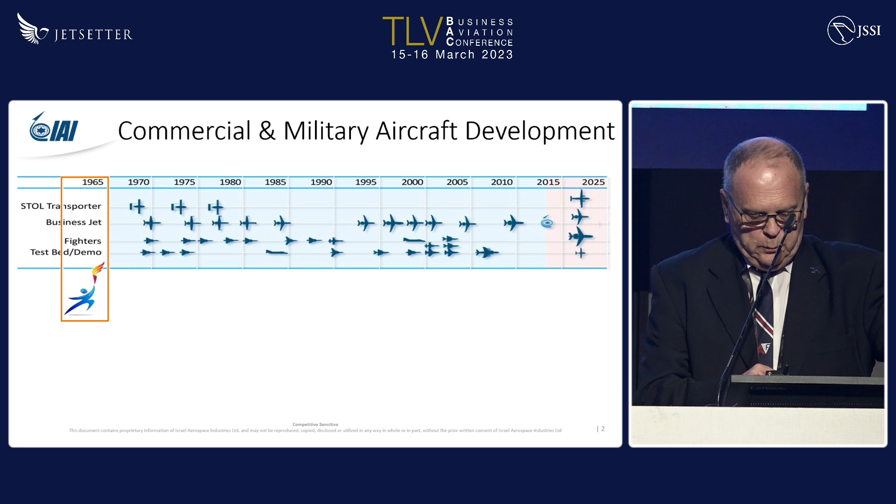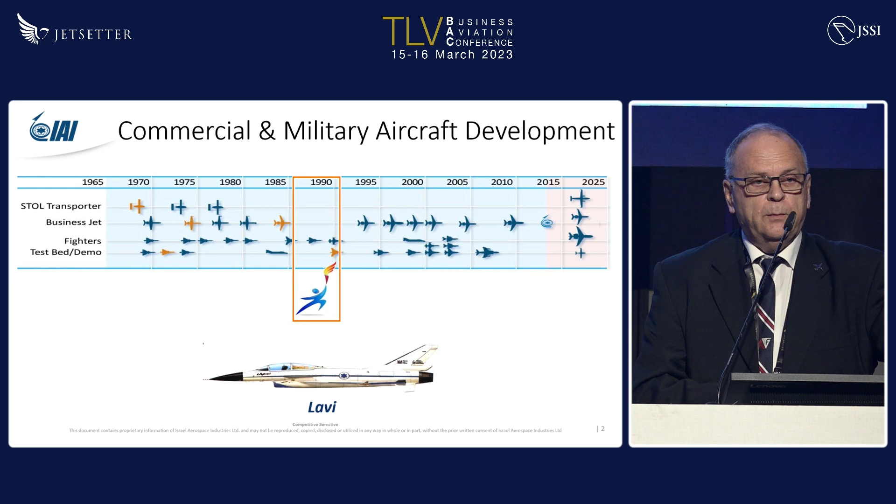This is the torch that we are carrying through the years. You can see here the Arava in the 70s, the Kfir fighter, the West Wind, which started the real business jets, the Astra, which became the G100, the Lavi, the famous Lavi fighter, unfortunately canceled, the Galaxy G200, the G150, which was the first program that we made together with Gulfstream, and now the G280, and the future is ahead of us.

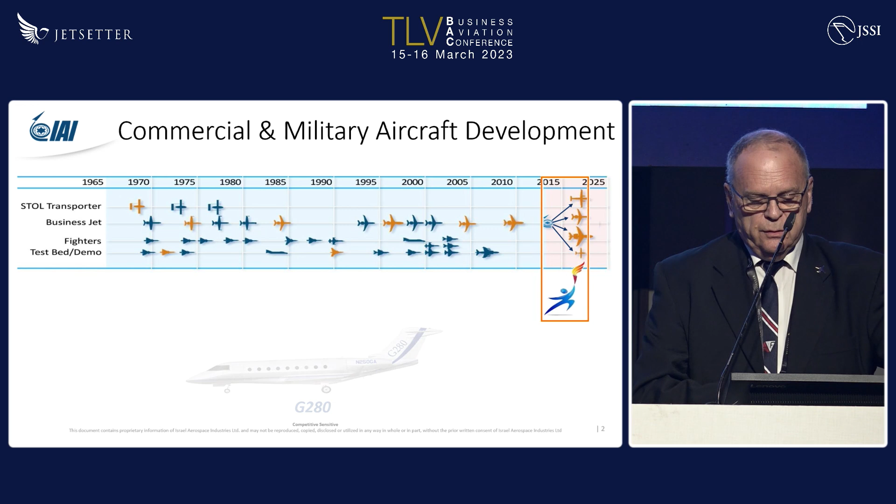So, a few notes about our line of business jets. We have the G150, which was co-developed with Gulfstream. By the way, I think it's the first time in the history of aircraft development that one OEM chooses another OEM to develop, produce, certify, and deliver a full aircraft. So the G150 was the first one. The G200 already existed, and the G280, which I'll talk about a little, is the next one. By the way, the G200 created the super mid-size niche.

It was followed by the Challenger 300 and so on. So now it's a proud thing for us. The G100, you have here the numbers. We produced 150 aircraft of that type.

The most important parameter for business aviation is dispatch reliability. It holds 99.63%, and the G150, 99.82. We delivered also close to 150 airplanes. The G200, as I said, the super mid-size, still holds a very high dispatch reliability, 99.88. Criteria of that is 1 or 0 if you have a delay of more than 30 minutes, and this is an NBAA standard. And the G280, our baby, which is in production now, 99.8 dispatch reliability, is the best in class according to external sources.

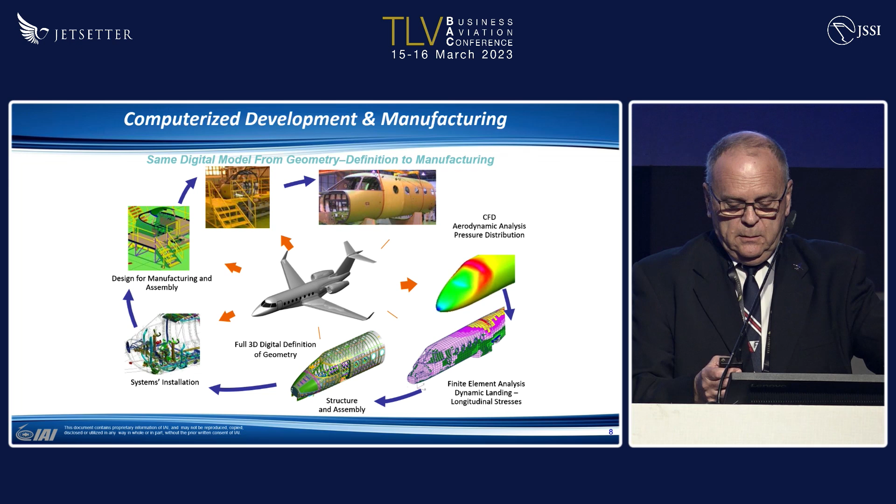So what it gives: first of all, I want to mention that our engineering development center has all the disciplines to create a clean sheet design of all platforms, including, by the way, UAVs. So they do it for all of IAI's applications, including also some integrated facilities: wind tunnel center, ground test center, flight test center, simulators, antenna and radome test ranges with a variety of applications which we will not talk about today, and system integration labs.

And it all comes together to a process which is led by the engineers, and all this certification process from preliminary design all the way to certification, and I'm talking FAR 25 certification, which is the same as for the big guys.

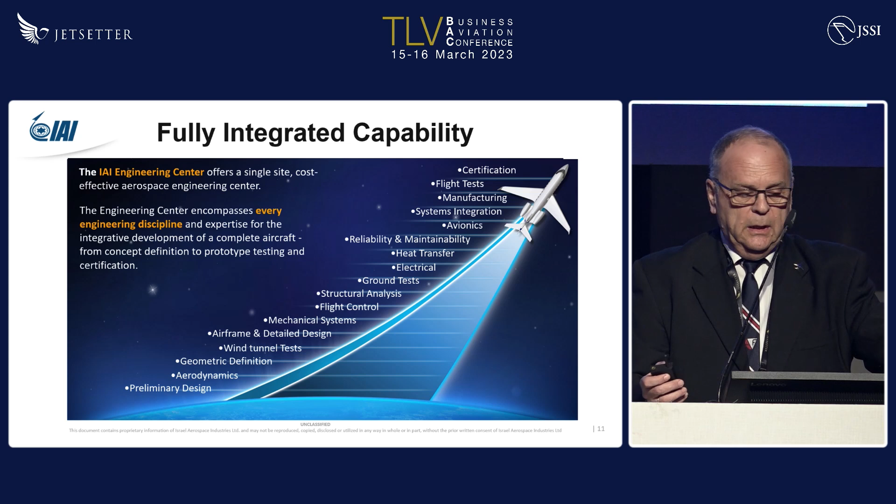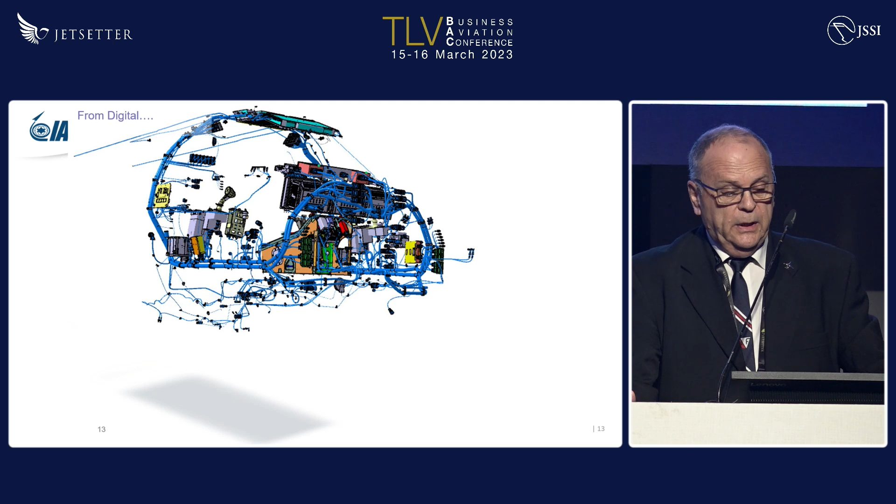Now a short illustration of how it's done. We call it from digital to reality. This is the digital mock-up. No more physical mock-ups, of course. Structure, systems, wiring, tubing, avionics, everything comes to the cockpit and creates the real reality. A look from outside, and this is how it's done. So precise design, accurate manufacturing, and it becomes a Lego process, no trimming, no shimming, as the slogan says, and that's how we do it.

Now, after we have the aircraft, we get to flight test, my favorite. This is a snapshot, a few scenes of the G280 certification flight test. This is the first flight, and we took the aircraft to almost all of the envelope, including landing gear operation, which is quite unique for first flight.

Nowadays it's more common. Telemetry room - we took the practices that we had from the fighters, that you don't need the room on the aircraft, which makes it more efficient.

This is some icing testing that we did abroad in the States. You see the remaining of the ice. It's a full campaign of what is called FIKI, flight into known icing condition, passed successfully.

And you see here now, wet runway landing. We did it in England on a special runway where you have the water measured by the FAA criteria. You see here the water on the runway, and the aircraft landed on water, to make sure that there's no damage, no ingestion of water to the engines, which is not above the certification requirement. This was also done successfully.

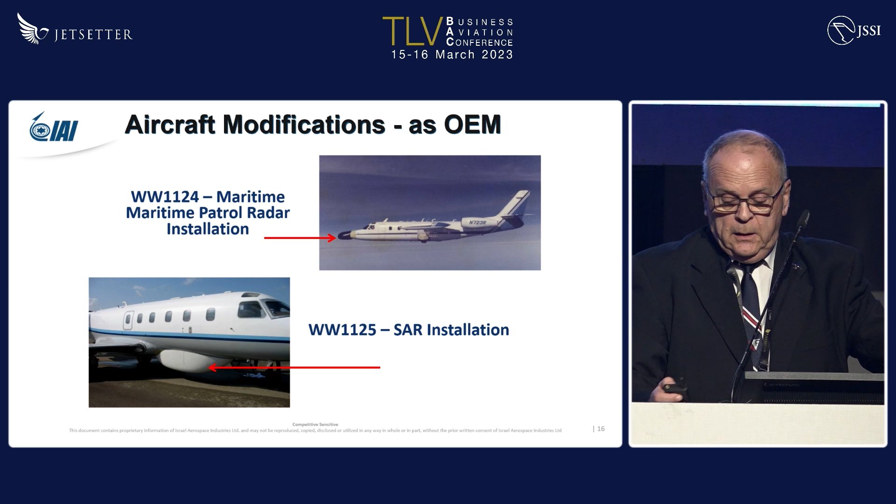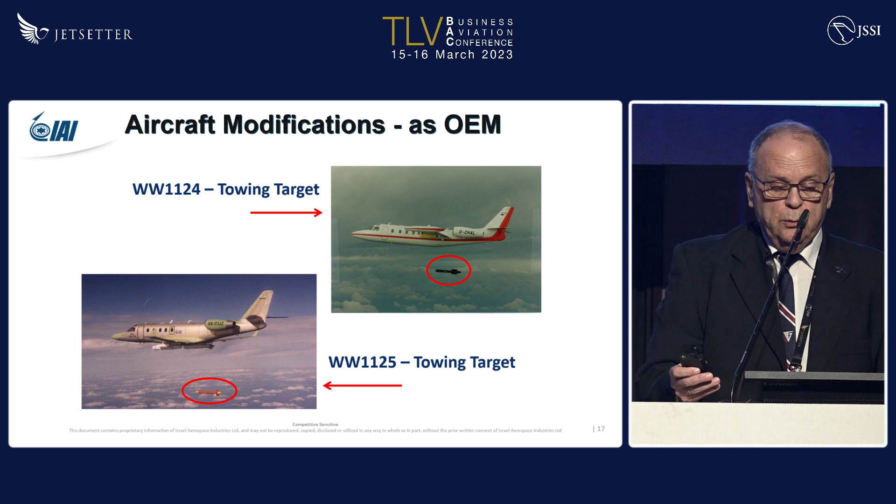So I would like to finish my presentation with a beautiful video, courtesy of Gulfstream, of our aircraft. Thank you very much.